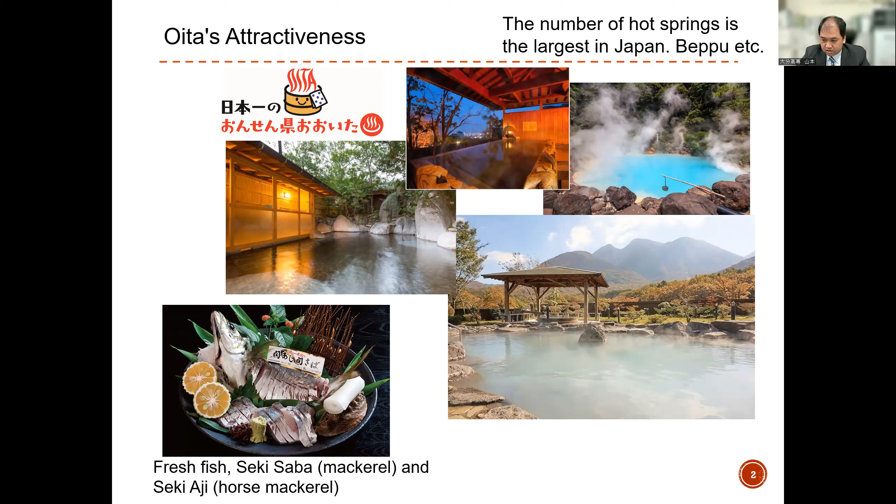Next, I will move to today's topic. Firstly, I want to speak about why maintenance of concrete structures is necessary, according to Japan's current situation regarding infrastructure. First, I want to check some technical terms. Corrective maintenance: major repairs are made after the structure's performance has deteriorated and damage has become severe. Second, preventive maintenance: repairs are made in the early stage of deterioration, before the structure begins to lose performance.

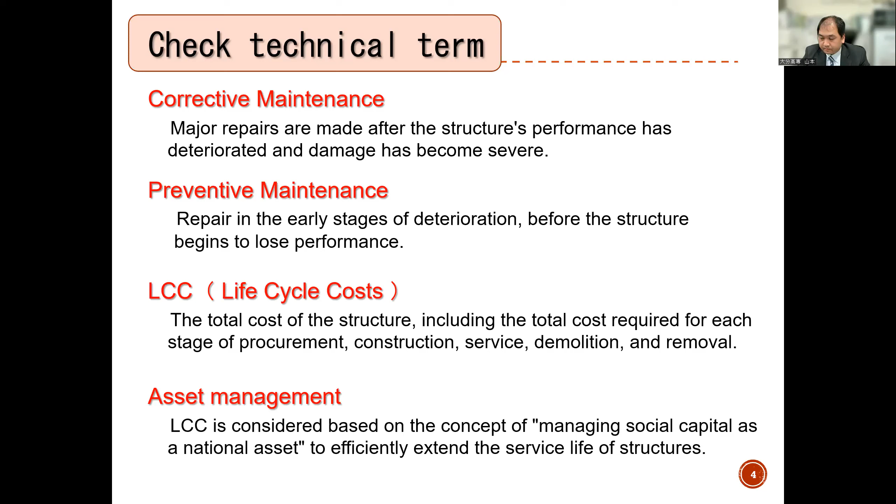Next is LCC, or life cycle cost—the total cost of the structure, including the costs required for each stage, such as construction, service, demolition, and removal. Next is asset management, where LCC is considered based on the concept of managing social capital as a national asset, in order to efficiently extend the service life of structures. This slide shows information from a report by the Ministry of Land, Infrastructure, Transport and Tourism, which is a government organization in Japan.

Countermeasure for aging social facilities. In Japan, the infrastructure developed during the high growth period, and that infrastructure is expected to deteriorate in the near future at the same time.

Here you can see the table. This table shows the percentage of social infrastructure that is more than 50 years old after construction. In Japan, around 30 or 40 years before, most of the infrastructures were constructed at almost the same time.

So the number of 50-year-old infrastructure will increase rapidly. Here you can see the 50-year-old after construction of the bridge: in 2018, 25%; in 2023, 39%; and in 2033 it becomes 63%.

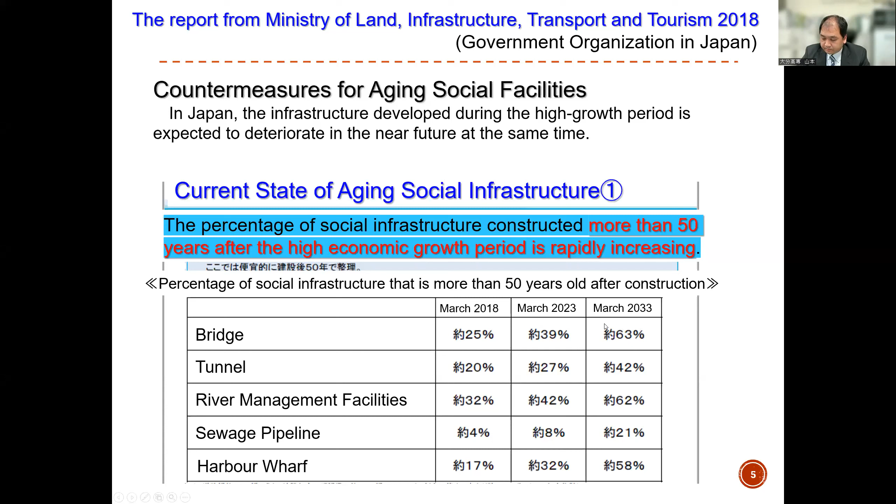Next shows the same condition of a bridge. This diagram shows the current state of aging social infrastructure, for example, road bridges over 2 meters.

In 2018, 25% of bridges are more than 50 years old. But in 2033, 63% of bridges become more than 50 years old. So in the Japan situation, most of the bridges should be repaired or maintained.

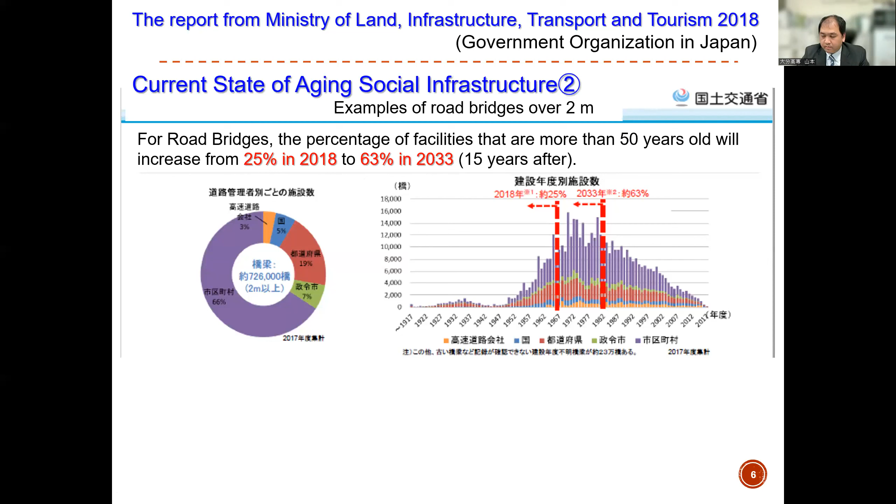And then the important countermeasure is how to optimize LCC and asset management. LCC indicates the initial construction cost, maintenance and management cost, and final disposal cost. The total cost is LCC.

And then, to promote a shift according to this thinking method of LCC, Japanese maintenance is shifting to preventive maintenance. It means that if the corrective maintenance method is chosen, the total cost becomes high. But with preventive maintenance, the total cost becomes lower.

So the Japanese government has to repair a huge number of infrastructures. As a countermeasure, the government started the preventive maintenance method. Perhaps in Indonesia, currently a huge number of infrastructures are ongoing construction. So in your country, how is it? You should also pay attention to LCC, how to optimize the LCC.

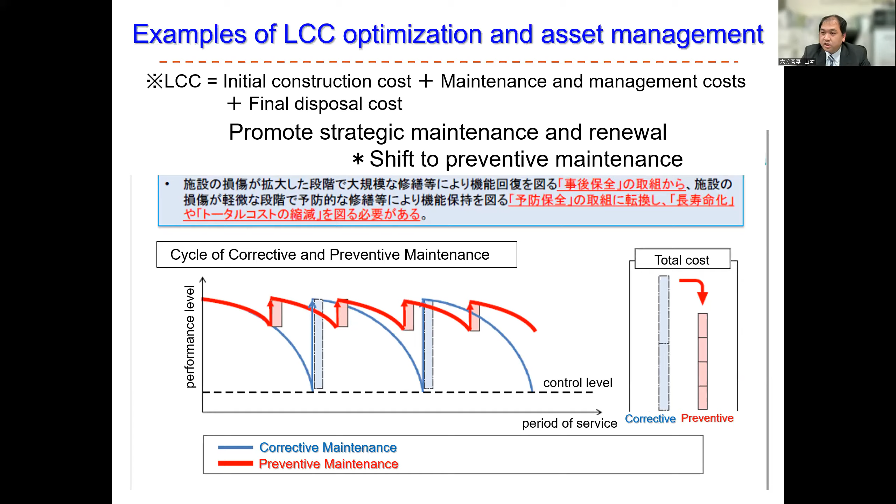Next, I will introduce the deterioration of concrete. Cracks in concrete can be categorized like that. Firstly, cracks caused by external forces. And as an initial failure, cracks due to drying shrinkage, cracks due to autogenous shrinkage, cracks due to thermal effects, and cracks due to age-related deterioration.

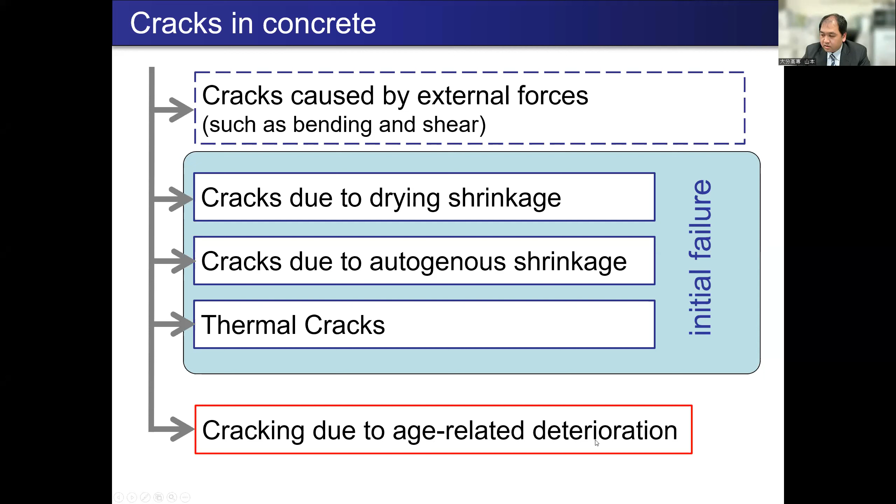Factors that cause structural deterioration: type of deformation number 1, initial failure; number 2, degradation over time; and number 3, structural deformation.

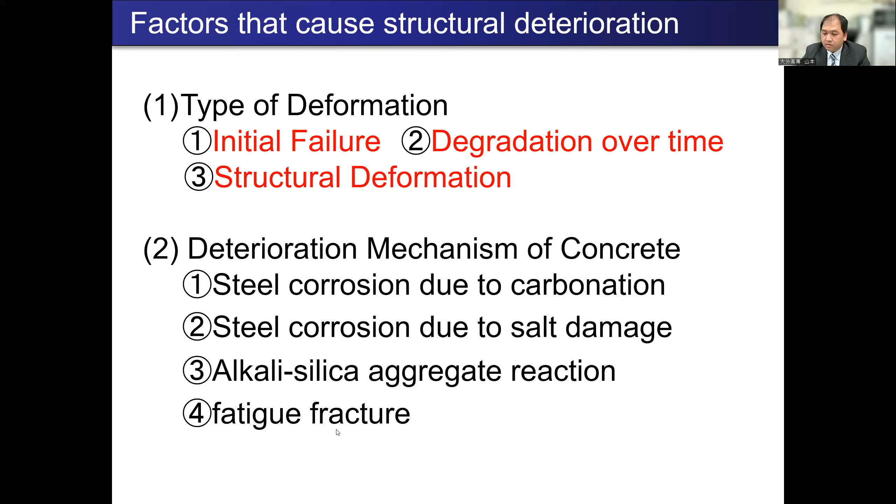The deterioration mechanism of concrete can be categorized into 4 types: first, steel corrosion due to carbonation; steel corrosion due to salt damage; alkali-silica aggregate reaction; and fatigue failure, fatigue fracture.

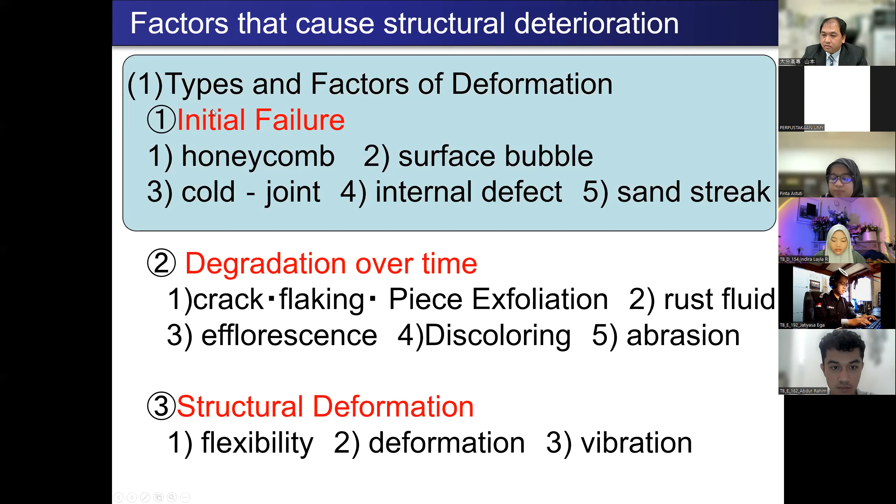As a structural deformation: flexibility, deformation, and vibration. As an initial failure, it can be explained like this: firstly, bleeding-affected failure, sinking crack, plastic shrinkage cracks, and water channels. Construction conditions affect failure: honeycomb, surface bubble, and cold joint.

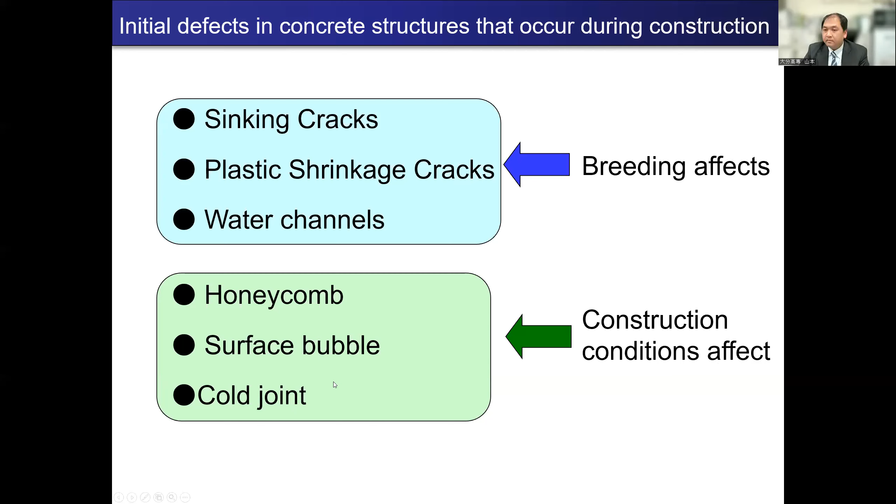This figure shows the bleeding that occurs in concrete. Bleeding is a kind of segregation, where concrete with a lot of bleeding shows segregation of the water. If the water-to-cement ratio is large, bleeding easily occurs. If the unit weight of water is large, bleeding will easily occur. If the granular content in aggregate is small, bleeding will easily occur. And if the slump is large, bleeding easily occurs. So under those conditions, bleeding easily occurs, and to restrain it we have to pay attention to those factors.

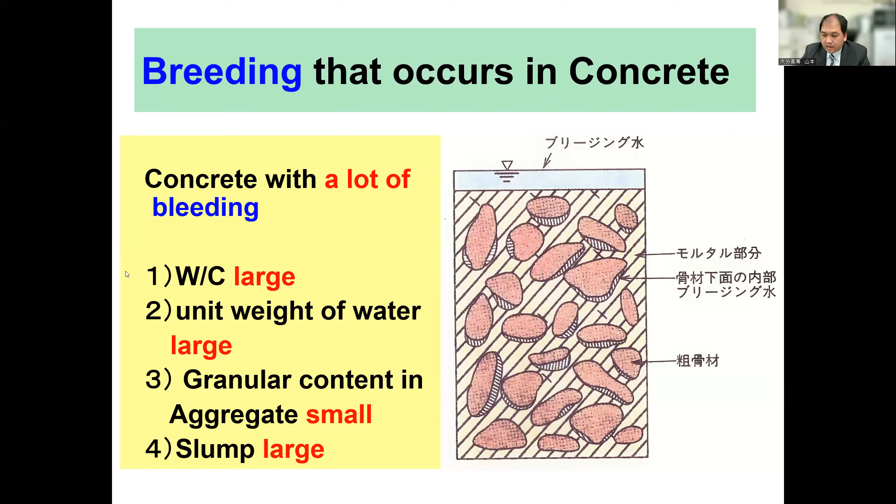Second, this figure shows sinking crack. Sinking crack means that if bleeding occurs on the concrete, the water will rise up. Instead, the surface of the concrete will sink, and the water will come up to the surface. Then a water channel will remain even after the concrete hardens, and the water also gathers at the bottom of the steel. Then after hardening, this area becomes a kind of void. This is sinking crack.

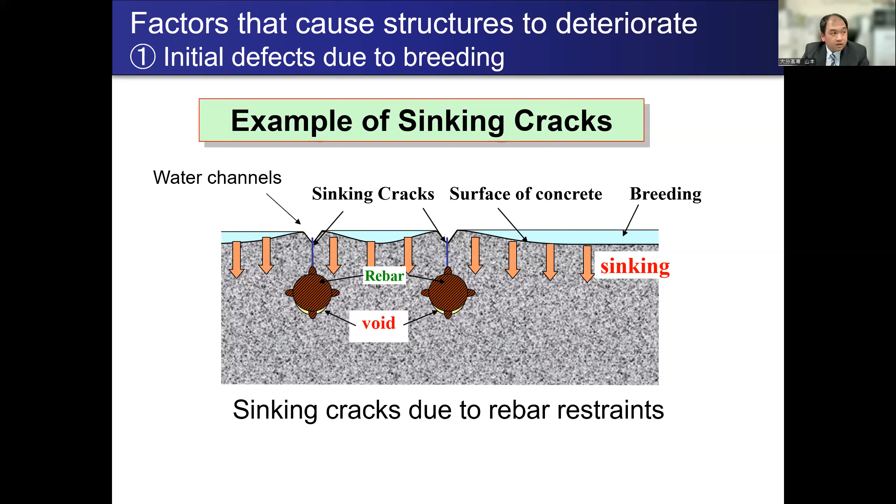Next, if sinking crack or a large amount of bleeding occurs, the water channel will remain even after the concrete hardens. From this picture, can you see the water channel remains? And if carbonation occurs, then along this water channel, CO2 easily penetrates into the internal part of the concrete.

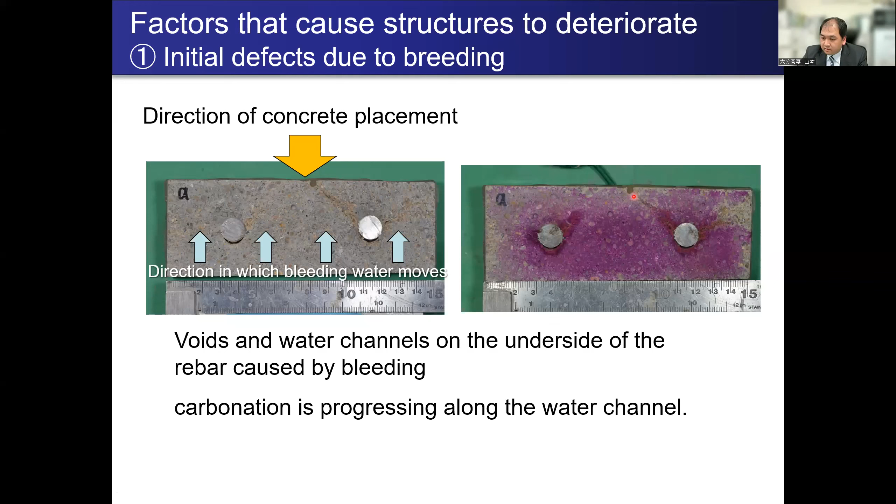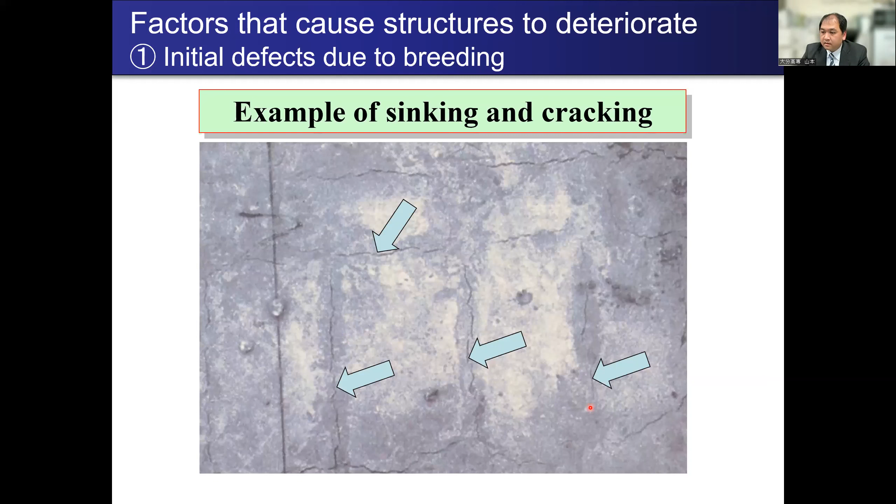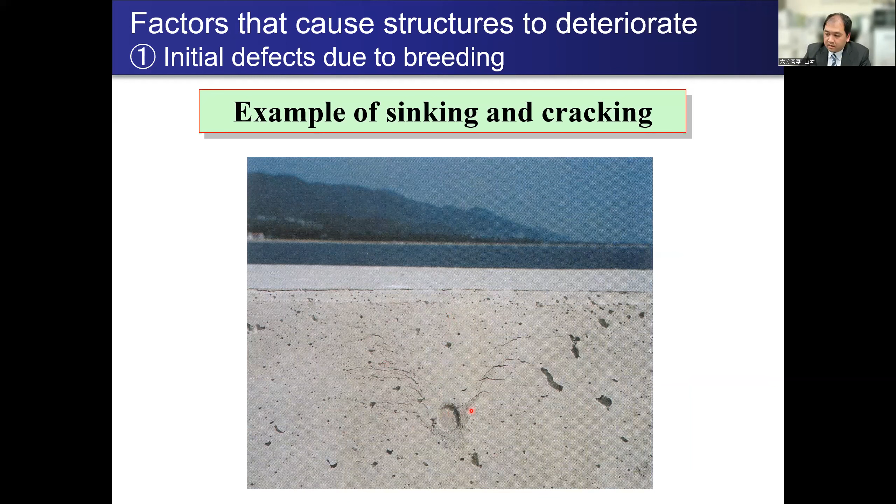This is a water channel, and along this water channel, carbonation proceeded. This is the sinking crack from the surface of the concrete. You can see the cracks along the rebar. This is also due to a much amount of bleeding. This is a kind of water channel, and this also the sinking crack. Before the concrete hardened, fresh concrete becomes sunk, and then the crack remains even after the concrete hardens.

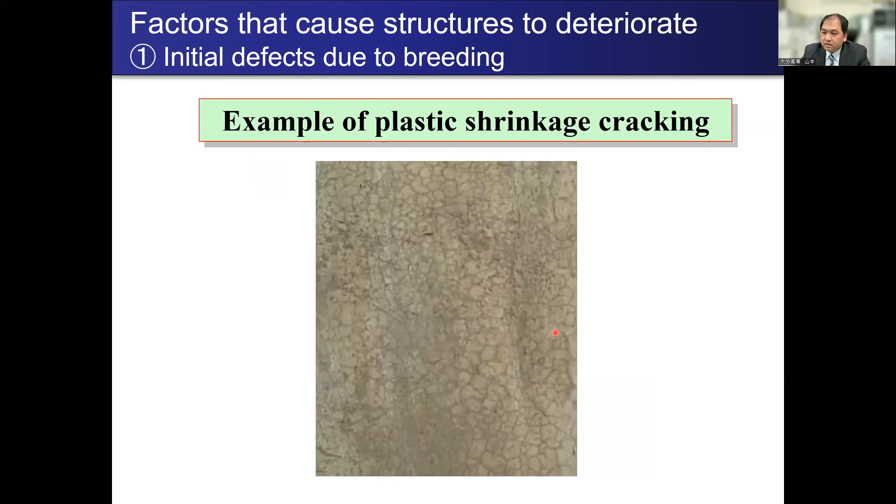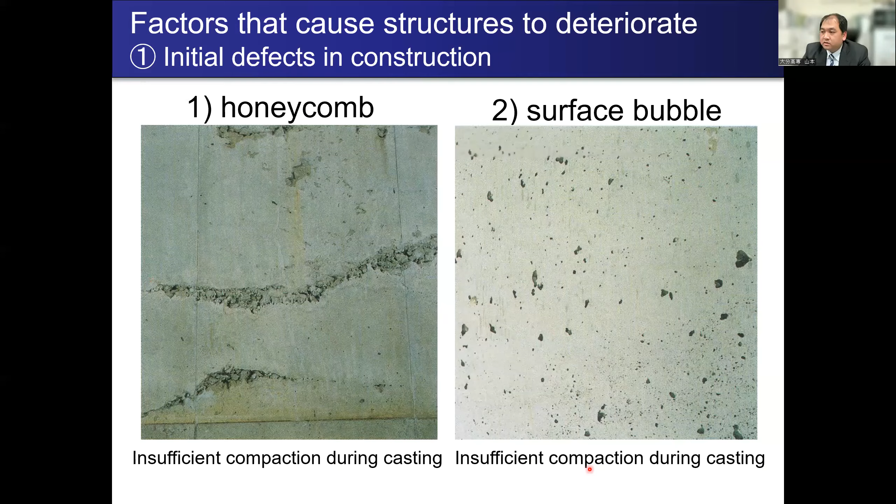Next is cold joint. What is the cold joint? The time interval between the lower and upper levels during casting was too long. If the interval time is too long, this kind of cold joint will occur. At the time of casting, if the interval is too long, the lower part of concrete starts hardening. Then even when the upper part of concrete is casted, it already starts hardening at that time. So here, this kind of crack will remain. This is cold joint. Next, internal defect.

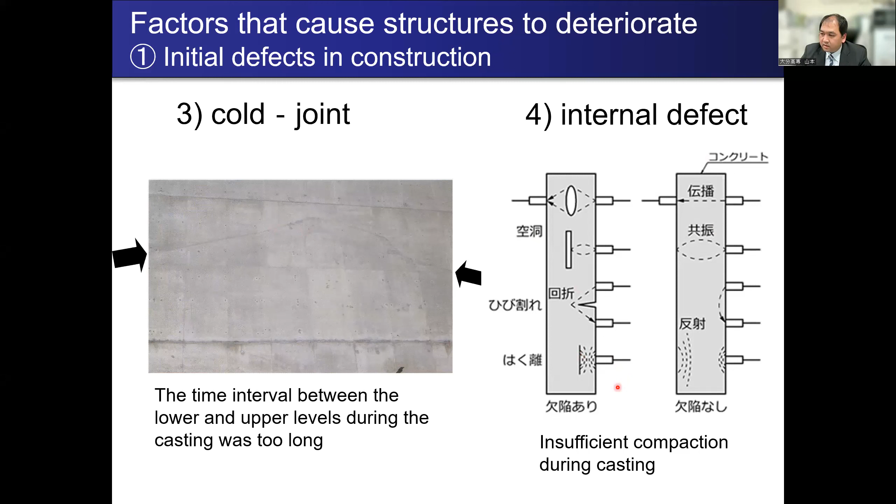Internal defect is a kind of honeycomb, or some kind of void that remains inside the concrete. That is internal defect. And sand streak: lack of viscosity of the fresh concrete fit between the formwork and the concrete. Bleeding water was rising from the gap between the formwork and the concrete, then the surface of concrete becomes like this. Between the formwork and the concrete, the bleeding water will rise up, so the surface of concrete becomes like this. This is sand streak.

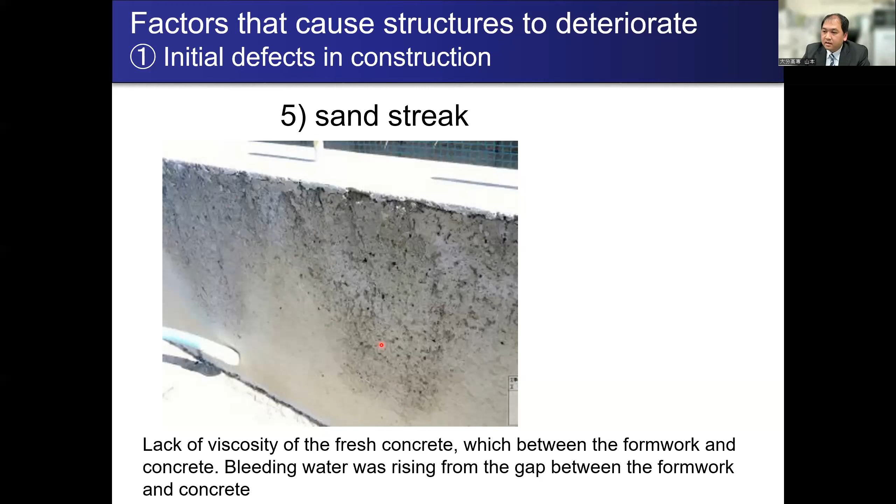Next is degradation over time. This is due to corrosion. Firstly, number one is crack, flaking and piece exfoliation. Due to degradation over time, pieces of concrete will fall down. That is crack, flaking and piece exfoliation.

Second is rust fluid. Because the steel bar already corroded, the rust fluid comes up to the surface of concrete, then the concrete surface will be like this figure.

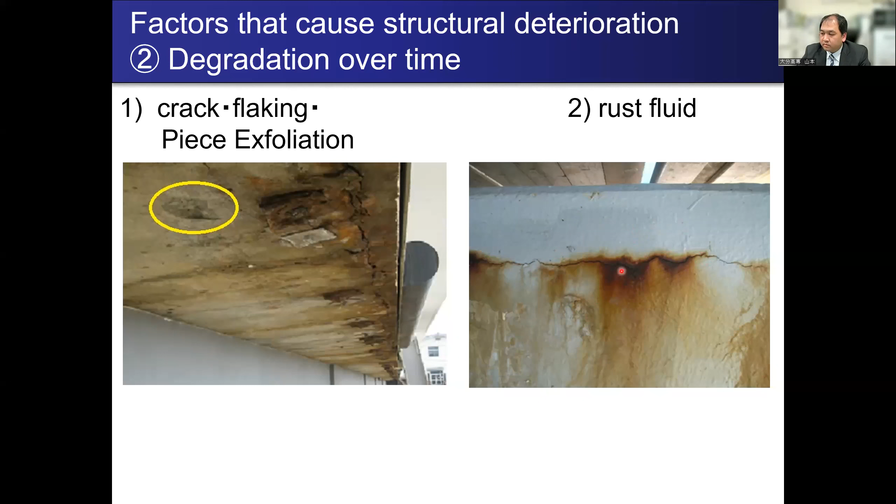Next is efflorescence. Due to an existing crack, the internal calcium dissolves into water, and with the water, the calcium comes to the surface of concrete. Then the surface of concrete will be like this picture. That is efflorescence. And discoloring: how to say, it becomes dirty. Discoloring means it becomes dirty.

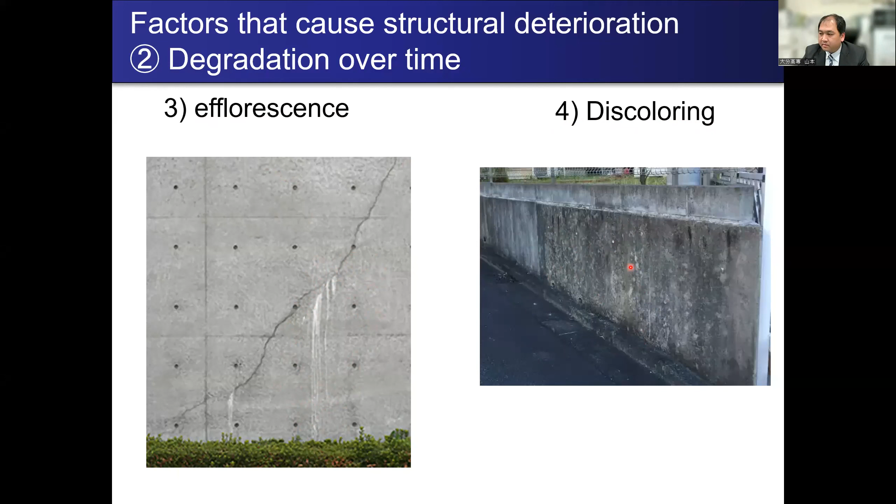And abrasion: this is a water channel, and the surface part of cement paste is washed out. Then the aggregate appears. This is abrasion. Those are the degradation over time.

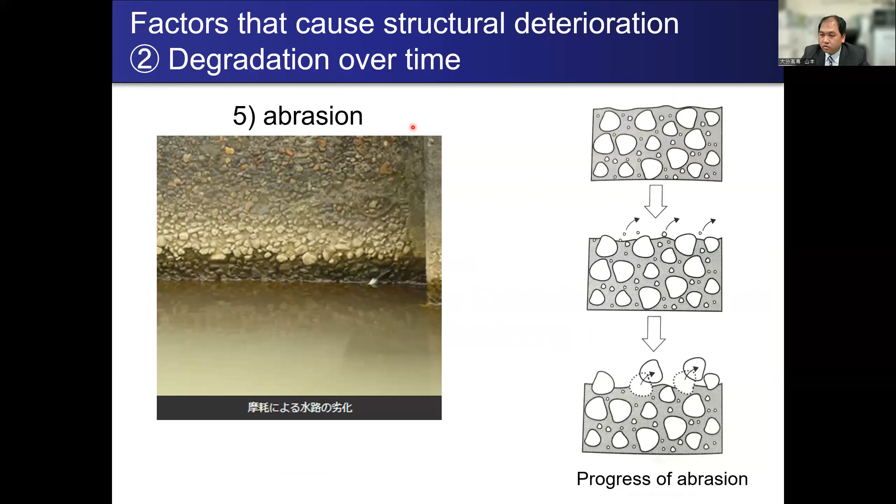Number 3, I will skip. Next, I want to explain the deterioration mechanism one by one.

First is carbonation. Carbonation is a phenomenon in which atmospheric CO2 enters into concrete and causes a carbonation reaction with cement hydrate, such as CaOH2, thereby reducing the pH of the pore solution. The CO2 in the atmosphere comes into the concrete, and then the CaOH2 becomes CaCO3, and the alkalinity of the concrete reduces, and then the passivity film disappears, and progress of corrosion starts.

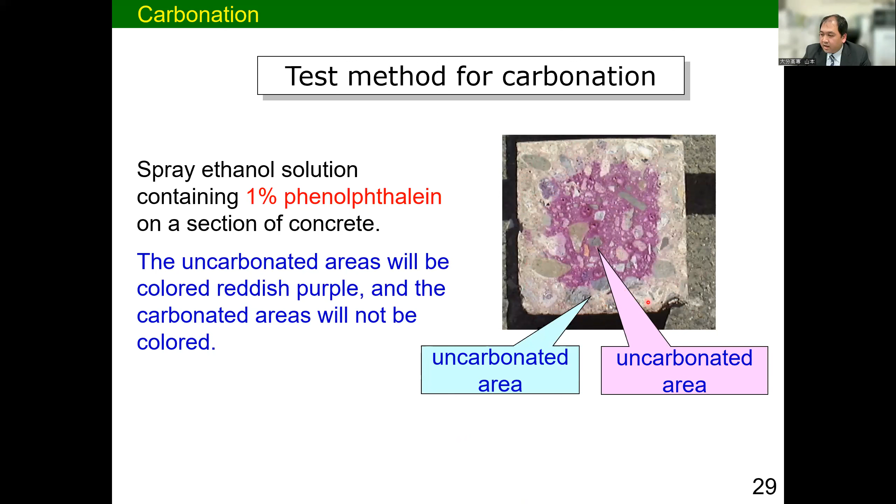Then, due to the corrosion of the rebar, cracking, concrete spalling and decrease in load bearing capacity will occur. How to check carbonation: spray 1% phenolphthalein. If enough alkalinity remains in the concrete, the color will be red purple. But if the alkalinity has already decreased, there's no color change. This no-color-change area is already the carbonated area.

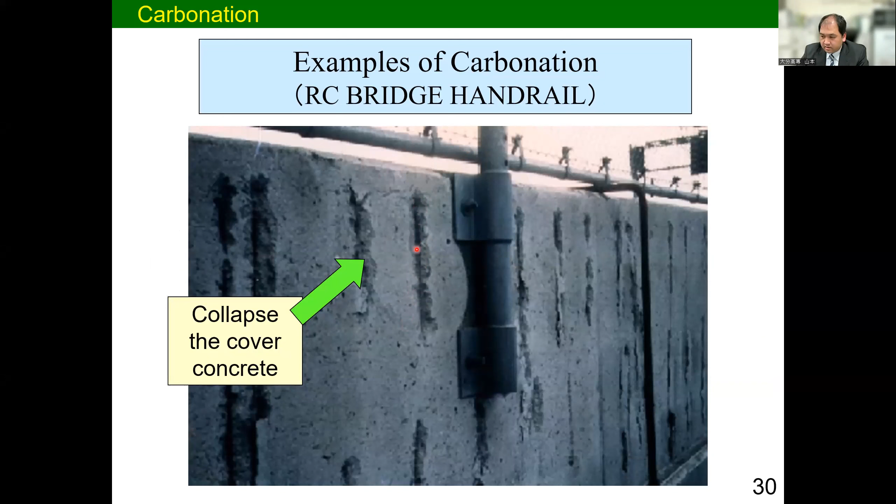Those are the deterioration conditions of RC members due to carbonation. Because of carbonation, the steel bar corroded, then the covering concrete part spalls. This is also due to carbonation. This is also due to carbonation. This is also due to carbonation.

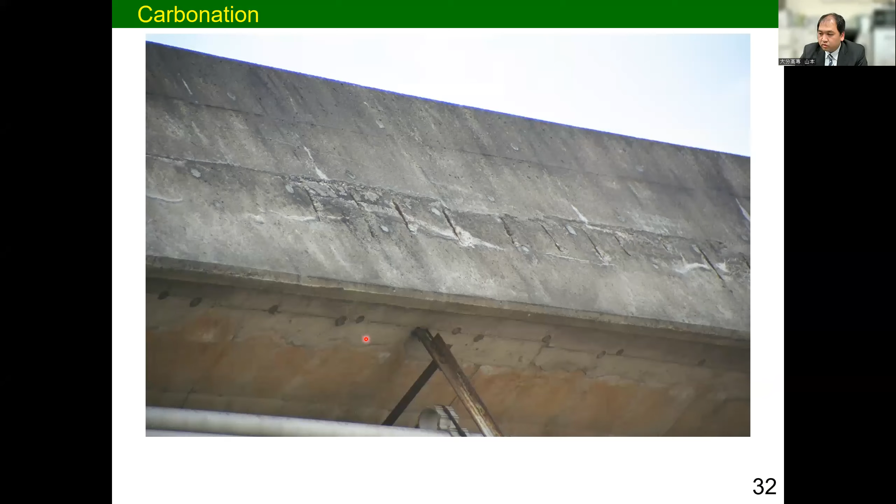Carbonation: if the carbonation area reaches the surface of the rebar, then the passivity film of the rebar will be destroyed and start rusting.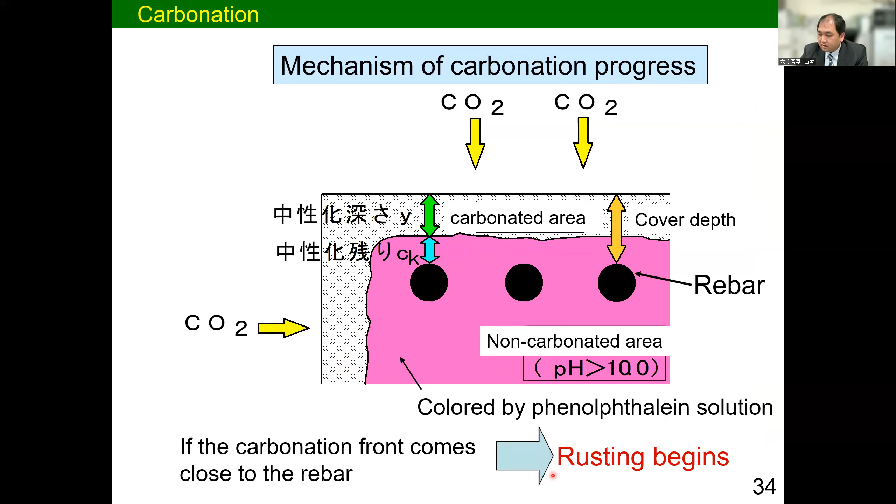Next is salt damage. Salt damage is a phenomenon in which the presence of chloride ions causes the corrosion of steel in concrete, resulting in rusting, cracking, spalling, and cross-sectional reduction of the steel due to the expansion of volume of corrosion products. If chloride ions penetrate the concrete and reach the surface of the steel, they destroy the passivity film, and then the corrosion process starts, leading to cracking, concrete spalling, and decrease in load bearing capacity.

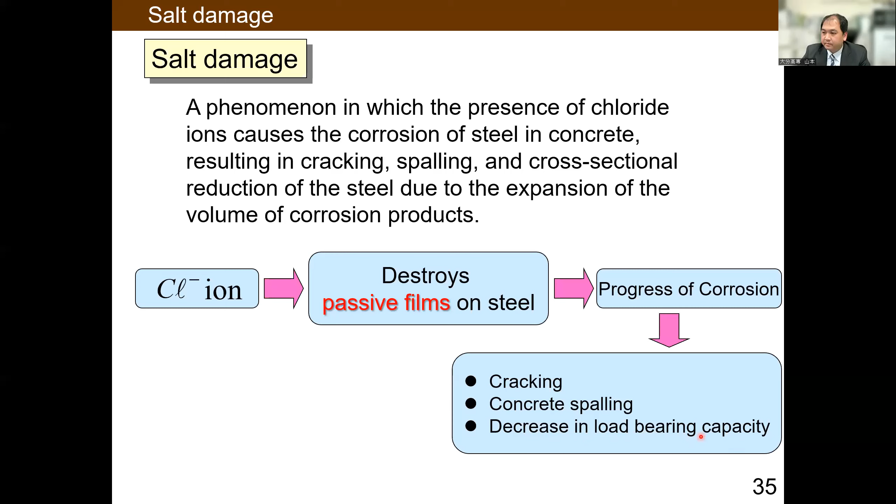So this is a chemical reaction of corrosion of the rebar. Because of this mechanism, the metal Fe of the rebar will be corroded.

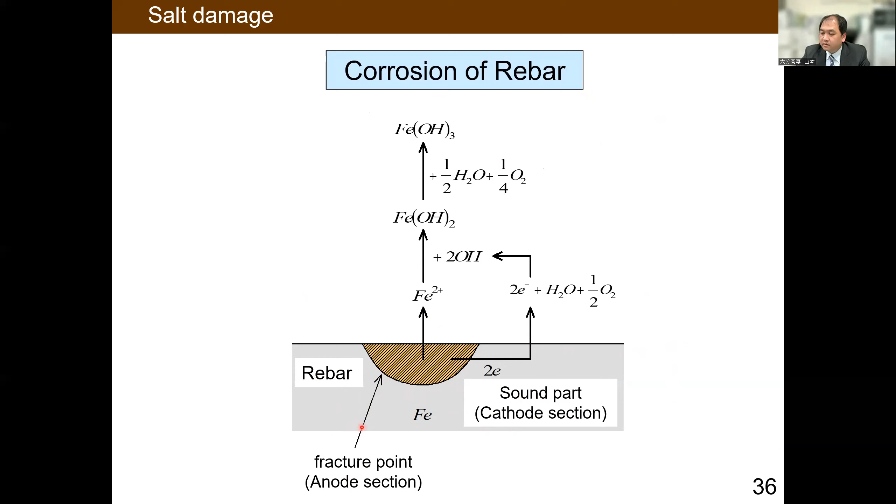Those pictures show the scenery of corroded RC members. Due to chloride ion, the steel bar corroded and the covering concrete already spalling.

Next, actual cracks due to chloride corrosion. Along this line, the steel bar is embedded, but the steel bar already corroded. On the corroded area, the steel bar expands, then cracks appear. You can see rust stain.

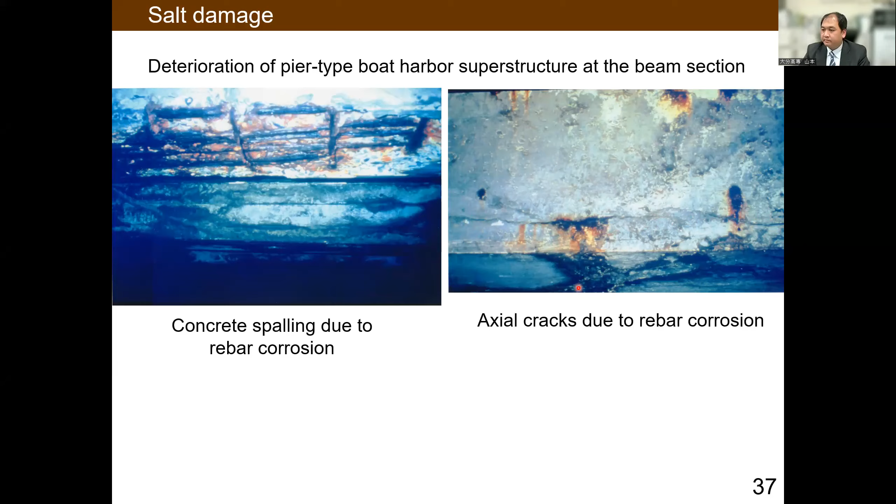Next is progress of salt damage on PC bridge girder. It progresses to section loss and failure of stirrups and PC steel wire. It might be necessary to consider whether it is necessary not only to repair but also to reconstruct the lost bearing capacity.

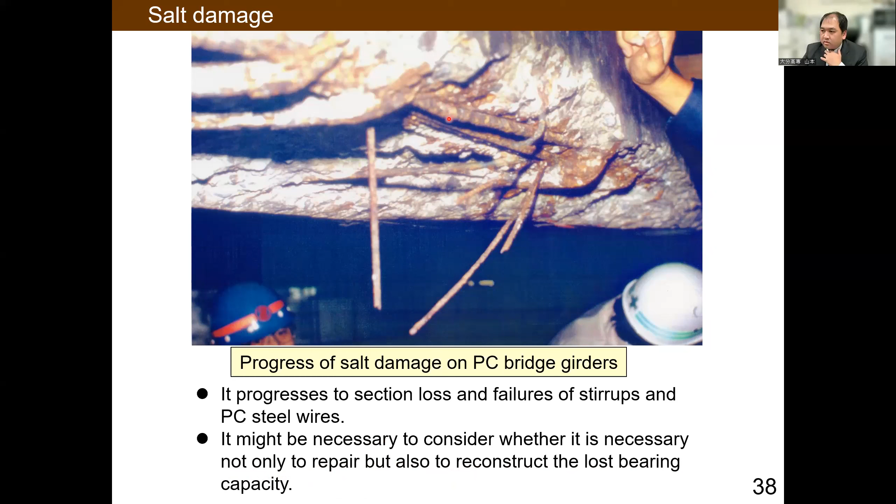And next is alkali silica reaction, in other words ASR. What is ASR? Aggregate reacts with alkali inside concrete, then expands the aggregate and crack occurs. That is ASR.

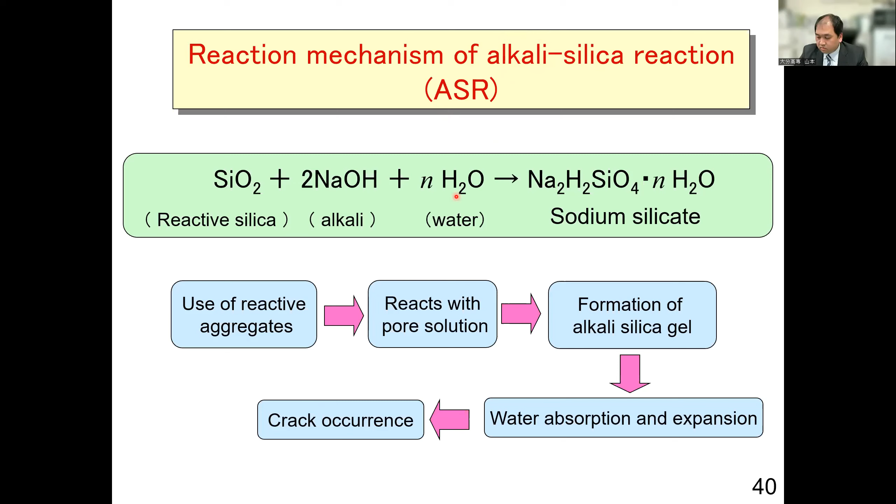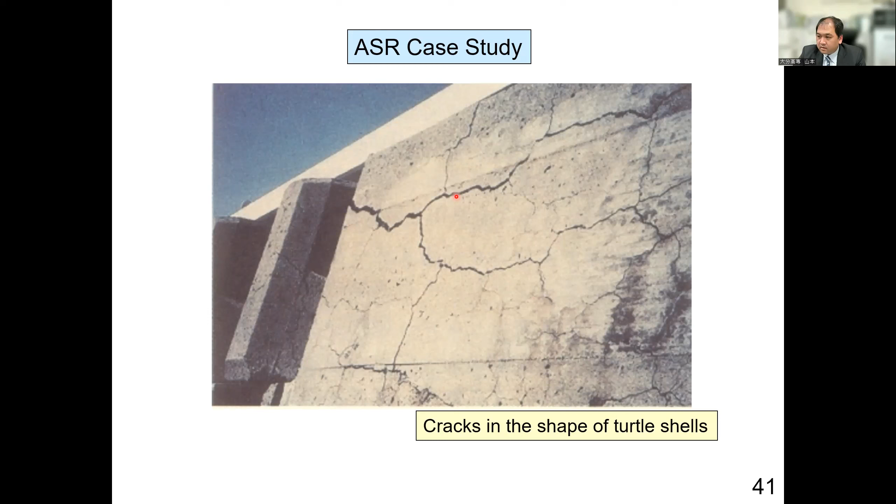This is a case study of ASR. Cracks in the shape of turtle shells. This is also ASR.

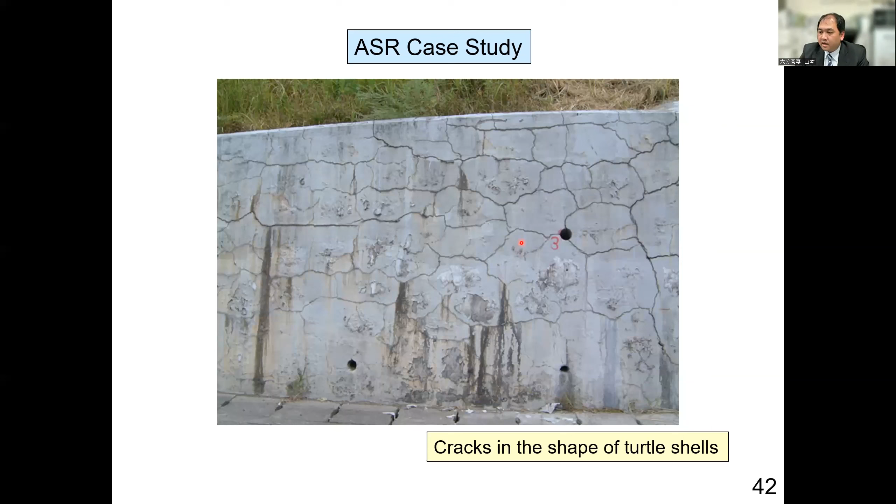Even if reactive aggregate were used and alkalinity is high, if there's no moisture, ASR will not occur. And even with high alkalinity and enough moisture, if reactive aggregate is not used, ASR will not occur. So those three conditions should be satisfied at the same time for ASR to occur.

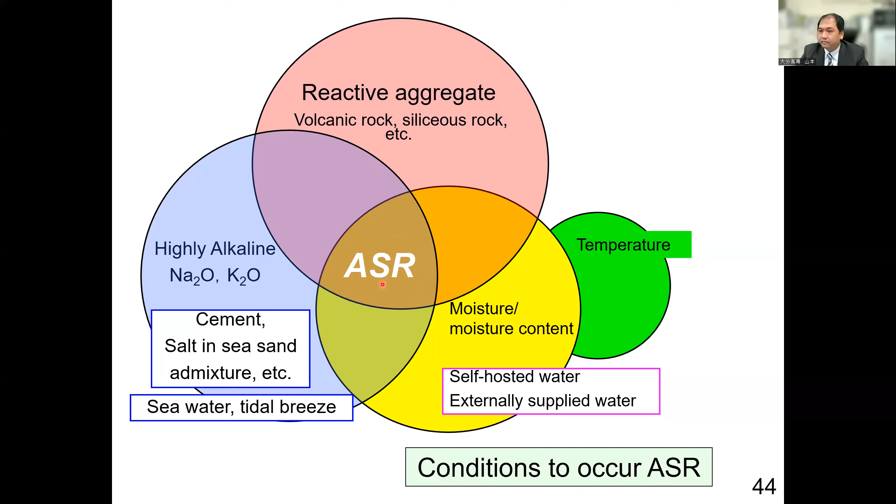Next is fatigue fracture, a phenomena in which a material is subjected to repeated loading at a level lower than its static strength, resulting in failure. Cracks develop and propagate in the concrete due to repeated loading, and eventually the load-bearing capacity is reduced due to steel fracture.

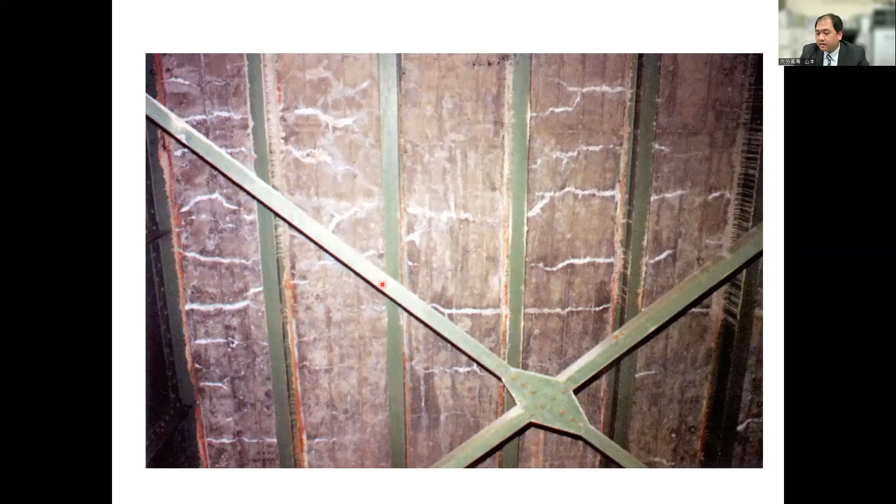Then the slab will be destroyed like that. Even small loading, less than static strength, but repeated...

A huge number of repetitions over a long term, then even small load acting for a long time, fatigue failure will occur.

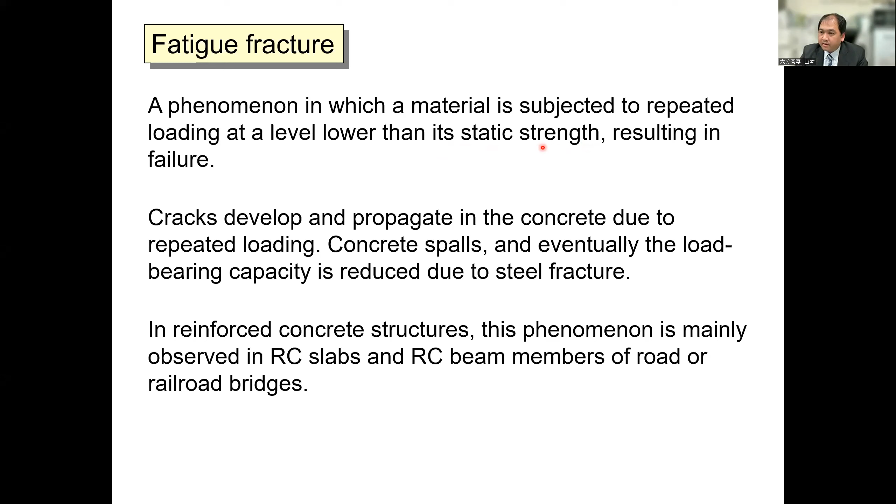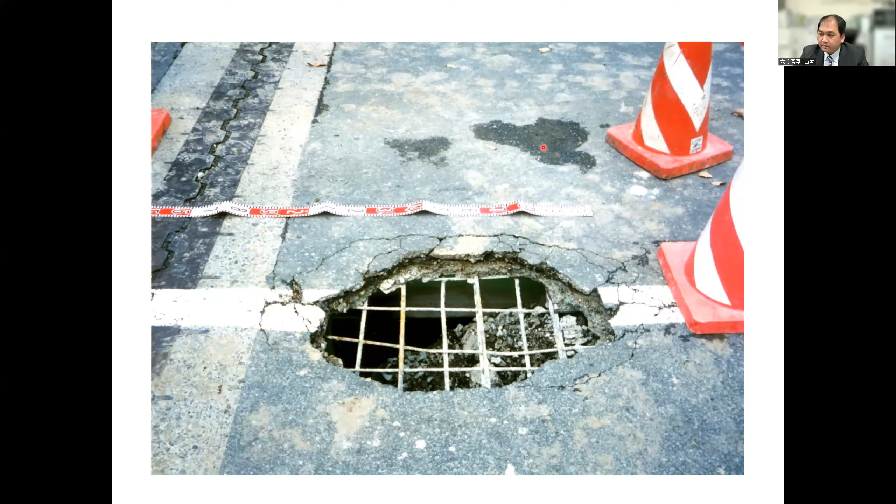In Japan's condition, most highway road bridges become around 50 years old. So this kind of failure is detected, and so many slabs were renewed nowadays due to fatigue failure.

So up to now, I explained about the deterioration or degradation of concrete. Then I will change the topic: how to make good concrete and prevent such kind of defect. I will explain how to make good concrete. What is good concrete?

If concrete has required strength, small hydration heat, is economical, has less initial defect, high durability, good workability and less segregation, then we can call that good concrete.

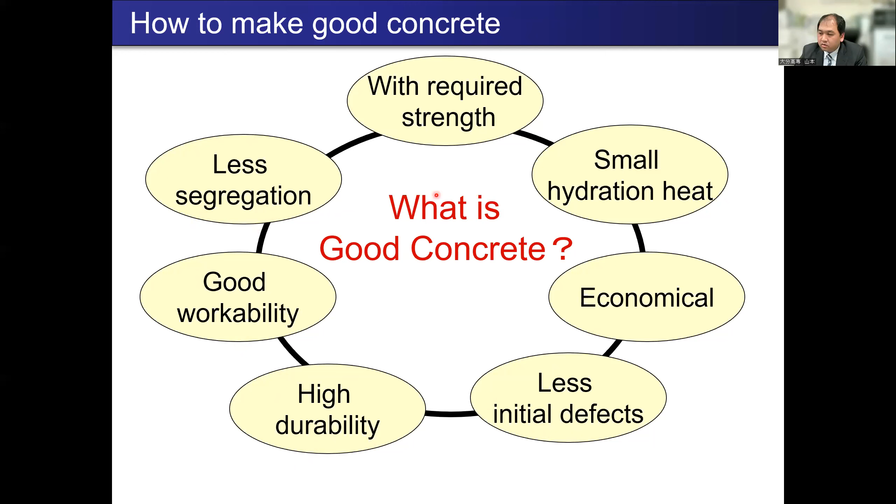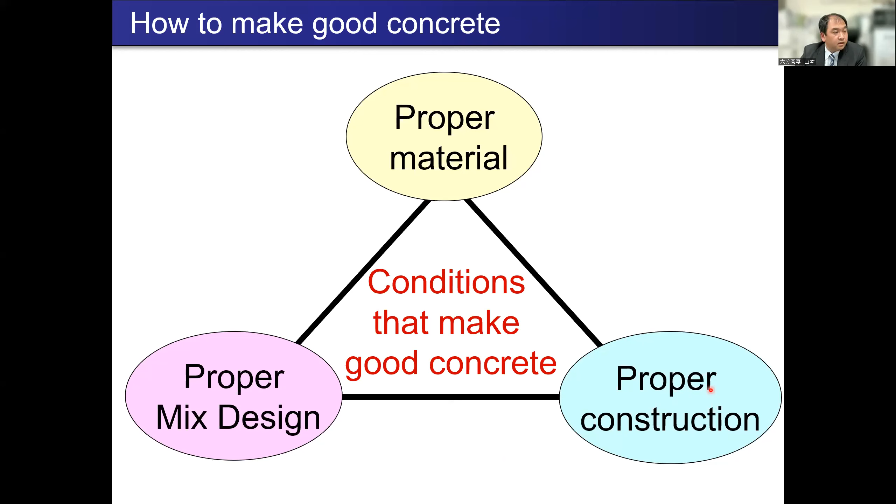And next, this diagram shows how to make good concrete. To make good concrete, we satisfy those three: use proper material, do proper mix design, and do proper construction. Then we can make good concrete.

And we have to pay attention to durability. We have to think about durability, the mechanism of degradation. What is the durability of concrete structures? Ability to resist weathering, chemical attack, physical abrasion, and other degradative actions, and to maintain the required mechanical and functional performance of the structure for a long period of time.

To make good concrete, good resistance to salt damage and chemical attack, frost damage, abrasion, ASR and carbonation is required.

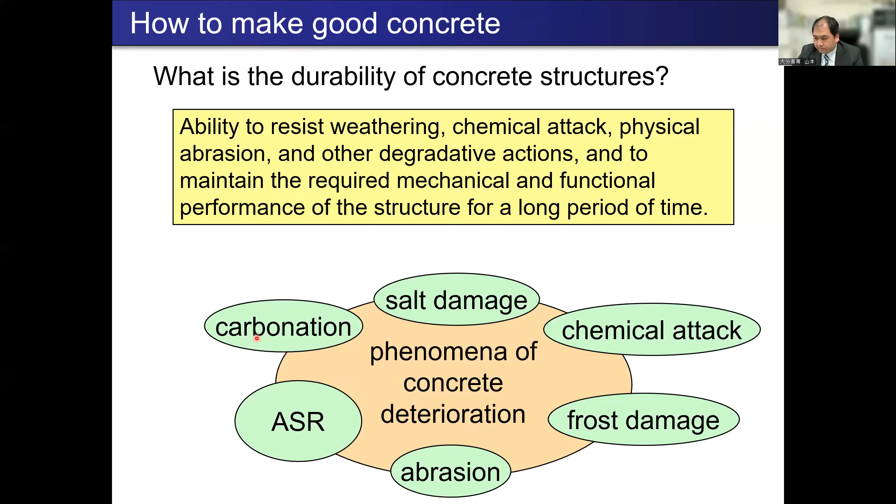Then, how can we make durable or good concrete? To make durable concrete: reduce water to cement ratio, densification of the microstructure of concrete, consider the possibility of thermal cracking in case of high cement content, select proper materials, and if proper materials were chosen, restrain water absorption.

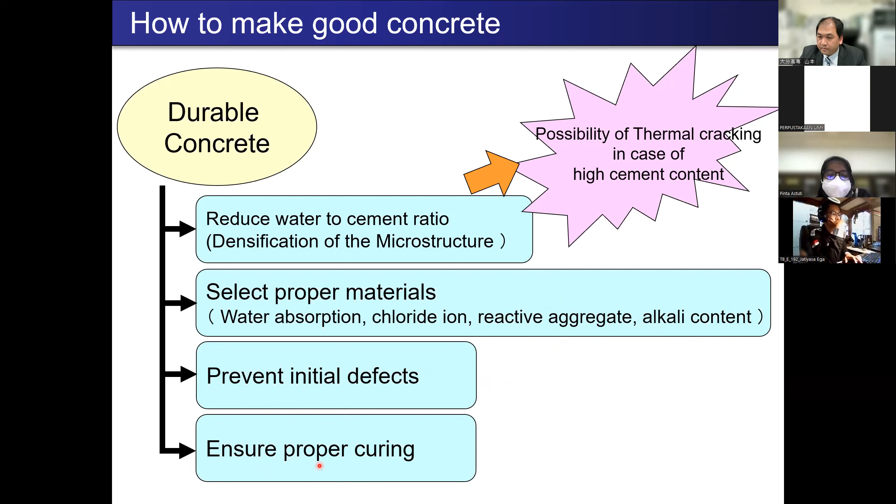Select proper materials. How to select proper materials? Small water absorption, and check the chloride ion and control chloride ion. When mixing concrete, do not use reactive aggregate, and control chemical alkalinity of concrete when mixing. And in construction, we have to prevent initial defect. After casting concrete, we have to do proper curing.

Next, this diagram shows the relationship between water to cement ratio and strength at 28 days.

If the water to cement ratio becomes higher, then the strength of concrete will reduce. Even if we use the same materials, if the water to cement ratio is smaller, the strength of concrete will be increased. When we design the concrete mixture, we have to pay attention to the water to cement ratio. If we choose a small water to cement ratio, then the strength of concrete will be increased. It means densification of the microstructure of concrete.

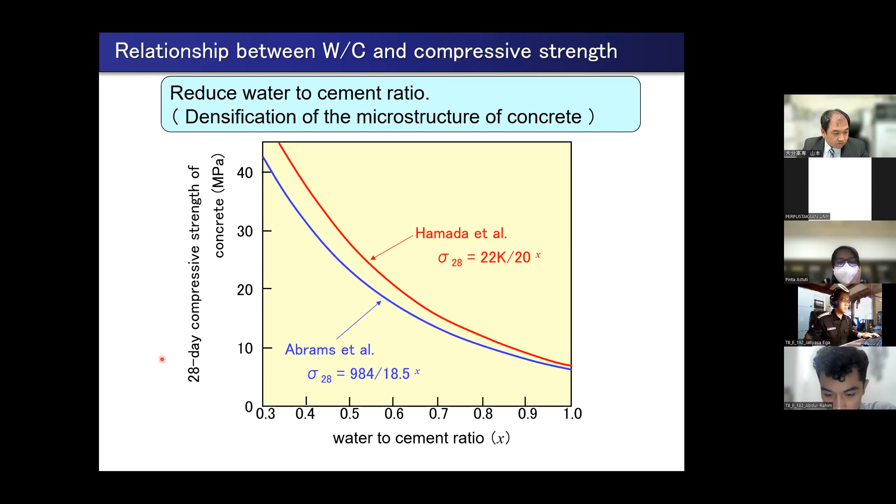This diagram shows the relationship between C by V, where V means void, or cement porosity ratio. If the void of cement is smaller, then the strength of concrete will increase. To make the void smaller, we have to choose a smaller water to cement ratio.

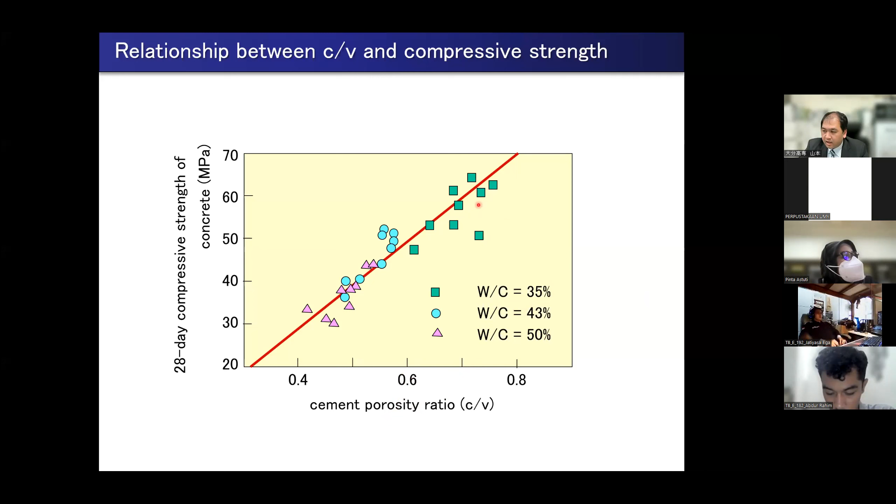This diagram shows the relationship between several curing conditions and strength of concrete. If the concrete were cured in air, the strength increment will follow this red line. If immersed in water until 3 days, then kept in air, the strength increment will follow this line. And if continuous wet curing were conducted, the strength increment will follow this blue line.

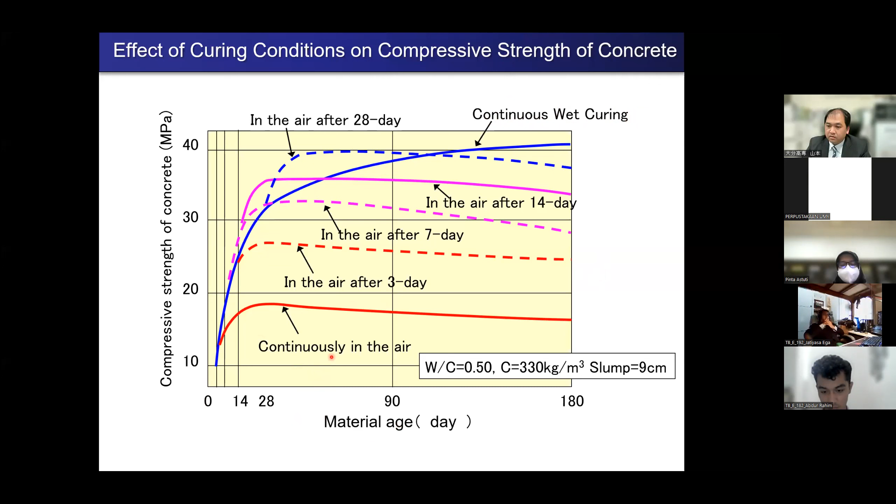So even if the same materials and same mixed proportions were used, if the curing condition is different, the strength of concrete will be different also. This shows the curing condition and strength of concrete.

Next shows the relationship between strength and durability. I explained that if the water to cement ratio is smaller, strength will be higher. But not only water to cement ratio, other conditions will also influence the strength of concrete. So even at the same water to cement ratio, different strengths occur under different conditions.

Usually for high strength concrete, if the strength is high, the durability is usually high. But durability may be varied even at the same strength. So this is not equal, nearly equal, but not equal.

Regarding the relationship between durability and water to cement ratio: if the water to cement ratio is lower, then the durability will become better. A small water to cement ratio means a highly durable concrete.

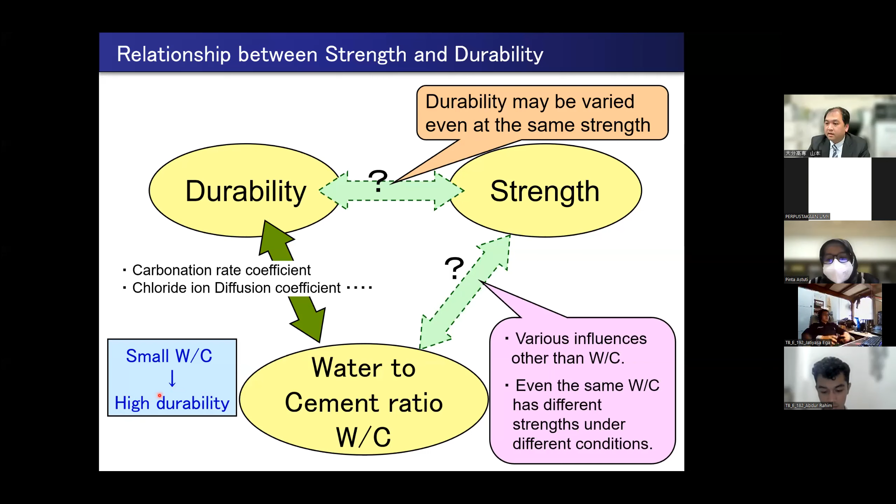Next, this diagram shows the relationship between total void volume and compressive strength. If the total void volume is smaller, it means durable concrete, and the strength becomes high. So this relationship indicates that as the void volume inside cement paste decreases, strength becomes high.

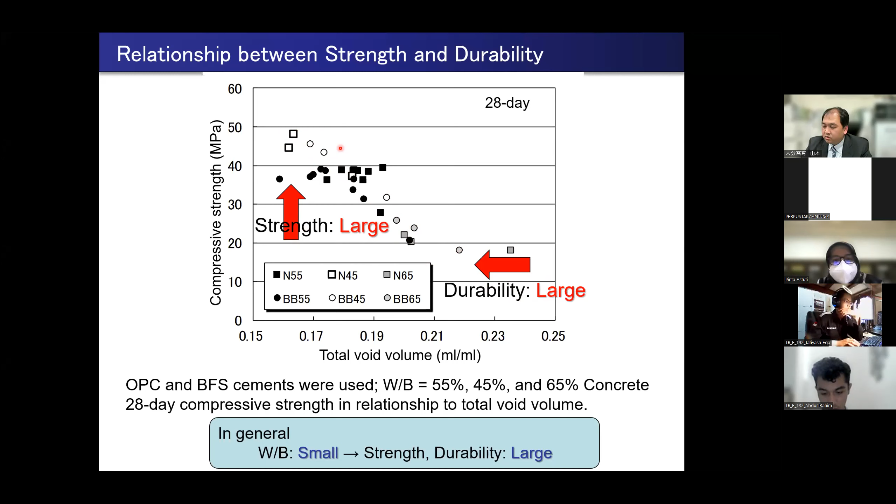High strength concrete has high durability. This is one case. But if the curing condition becomes different, the durability becomes a different condition.

Even if the same concrete were used, if the curing condition is different, then the durability of hardened concrete also becomes different. Until 28 days, curing in water indicates the best performance.

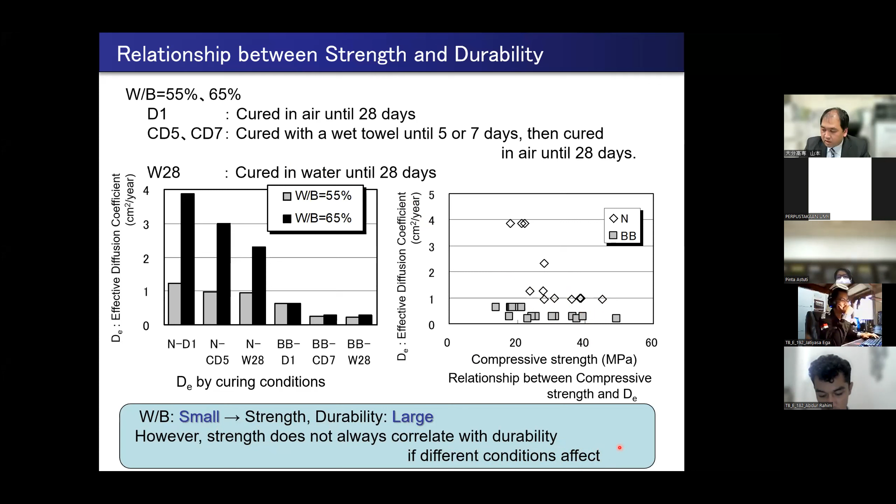This plot means if cured in air, the concrete has lower strength, but if cured inside water, the strength of concrete will increase. If the water to cement ratio is small, strength and durability will be large. However, strength does not always correlate with durability if different curing methods are used, which will affect the quality of concrete after hardening.

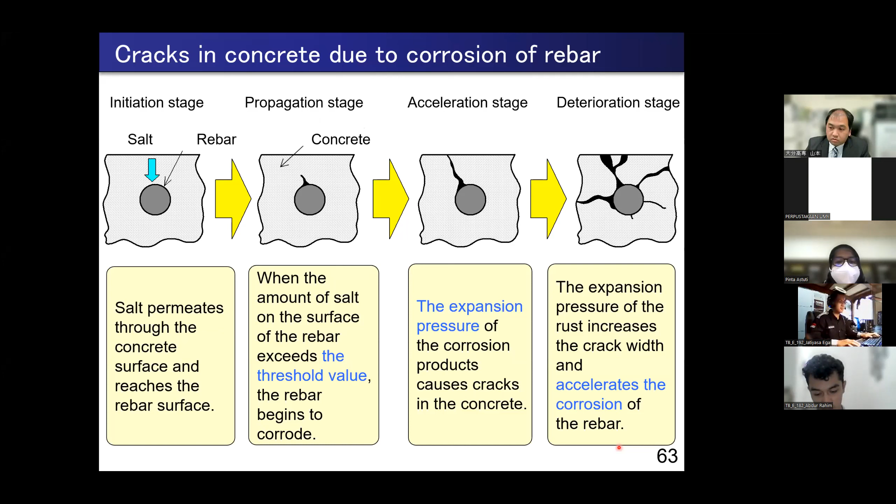Then, next. Up to now, I explained the degradation or deterioration of concrete and how to make good concrete and avoid such kind of degradation. Now I want to change the topic.

When considered from the aspect of environmental conservation, what is required for future concrete work?

In cement production of concrete materials, I mean the production of cement. For example, ordinary Portland cement is made mainly from limestone. The limestone is burned using a kiln at about 1,000 to 1,450 degrees Celsius.

During this process, CO2 is emitted to produce 1 ton of ordinary Portland cement. 766 kilograms of CO2 will be released. This is because thermal decomposition of the main raw material, limestone, CaCO3, becomes CaO and CO2 when burned using a kiln. This process uses a large amount of energy, so fossil fuels are consumed. The total amount of CO2 emission will be 766 kilograms per ton.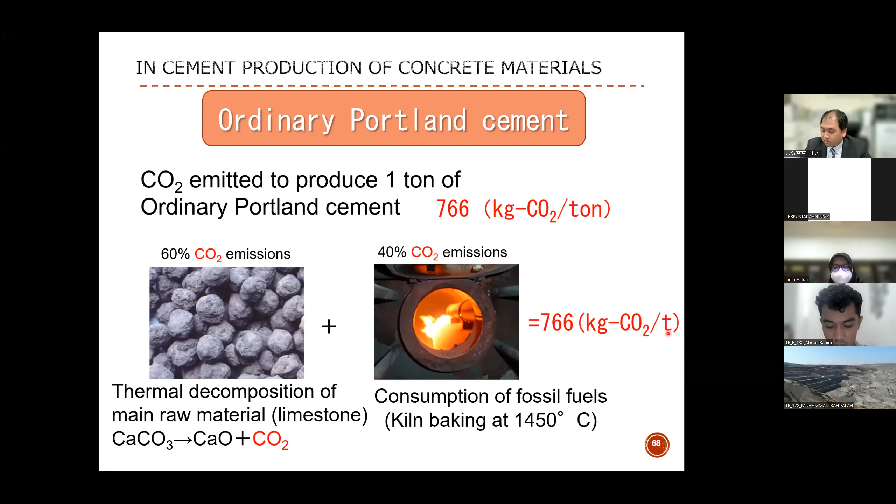So, if we use the cement, it means that during the process of producing cement, the CO2 will be emitted.

So what can we as civil engineers do to reduce CO2 emissions from construction? Here you can see active use of blended cement, for example blast furnace slag cement and fly ash cement. This can reduce clinker use, and reduction of clinker reduces CO2.

And when building a new concrete structure, LCCO2, life cycle CO2, should be reduced by constructing a high quality structure and extending its service life. In general, when LCCO2 is reduced, LCC will also be reduced, but the initial cost for construction will be higher.

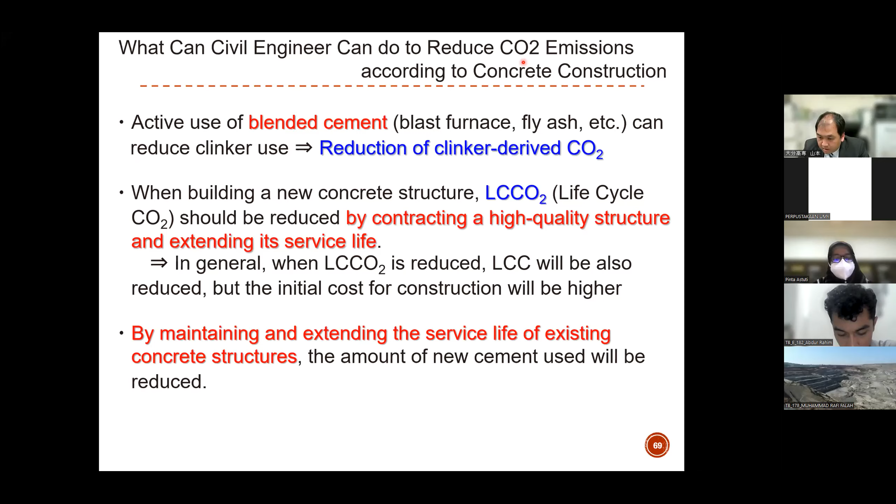If we can do these 3 items, then we can contribute to industry, innovation, and infrastructure, and sustainable cities and communities, and responsible consumption and production, and climate action. I think that is a very important point.

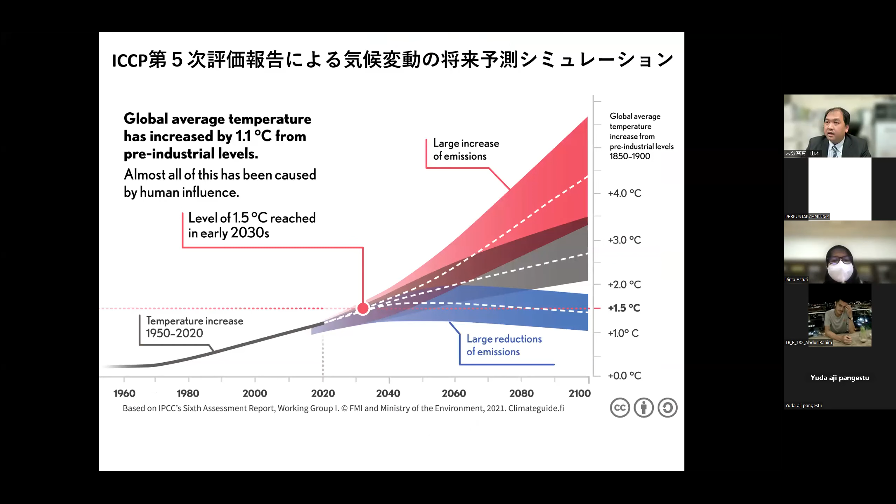Next, I want to introduce the basic principles of concrete production, 6 items, by Dr. Tokujiro Yoshida. Dr. Tokujiro Yoshida is a civil engineer of the Taisho and Showa periods. Born October 15, 1888, after teaching at Kyushu University, he became a professor at his alma mater, University of Tokyo, in 1938. He is known for his research on concrete and reinforced concrete engineering, and is considered a father of concrete engineering in Japan.

Yoshida Tokujiro said that concrete is cement paste integrated with aggregate. Second, cement paste determines the quality of concrete. Third, the properties of cement paste are determined by the properties of the cement, the degree of chemical reaction between the cement and water, and the concentration of the cement paste.

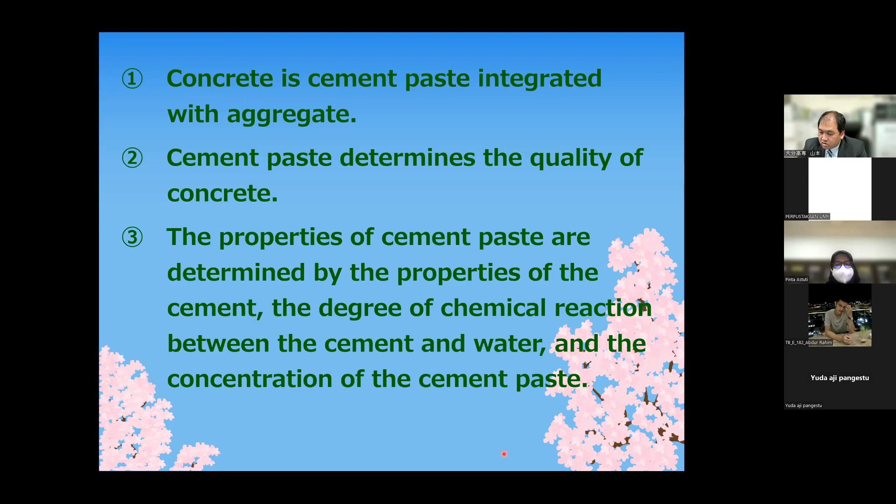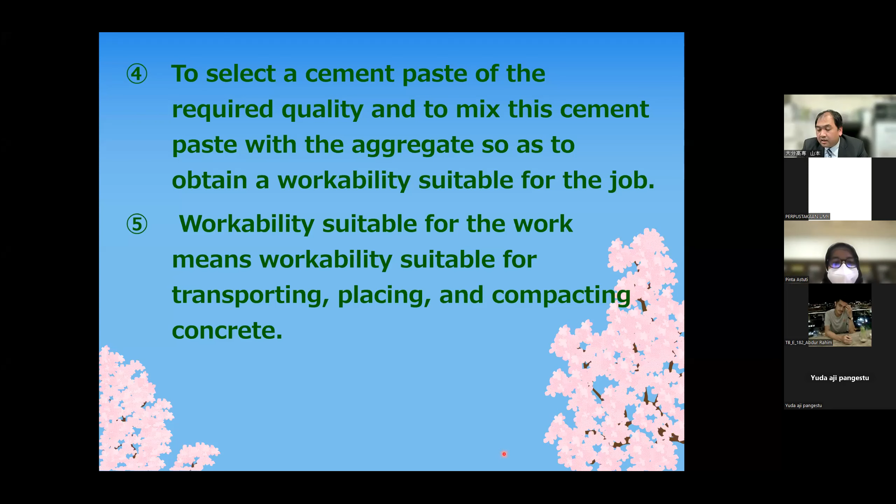Number 4, select a cement paste of the required quality and mix this cement paste with the aggregate so as to obtain a workability suitable for the job. Number 5, workability suitable for the work means workability suitable for transporting, placing, and compacting concrete. Number 6, the concrete shall be mixed, transported, placed, finished, and cured in such a manner as to fully demonstrate the properties of the concrete.

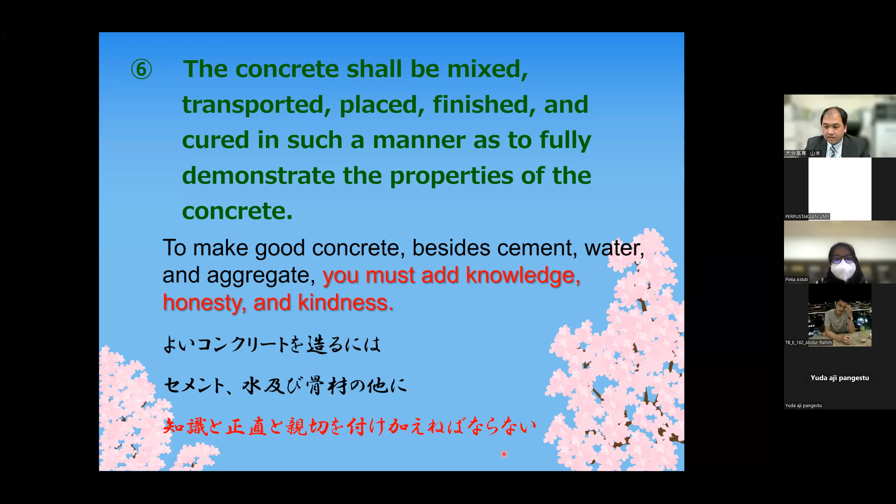And next is an important point. To make good concrete, besides cement, water, and aggregate, you must add knowledge, honesty, and kindness. He said this around 100 years before. That is all for my presentation. Terima kasih.

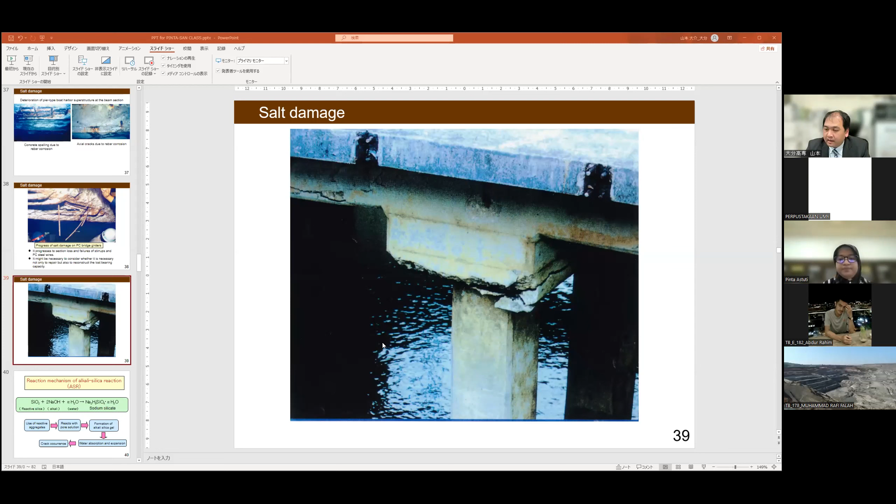And if the chloride ion penetrates concrete and reaches the rebar, then the chloride ion will destroy the passivity film on the surface of the rebar. And after destroying the passivity film, the corrosion process will start.

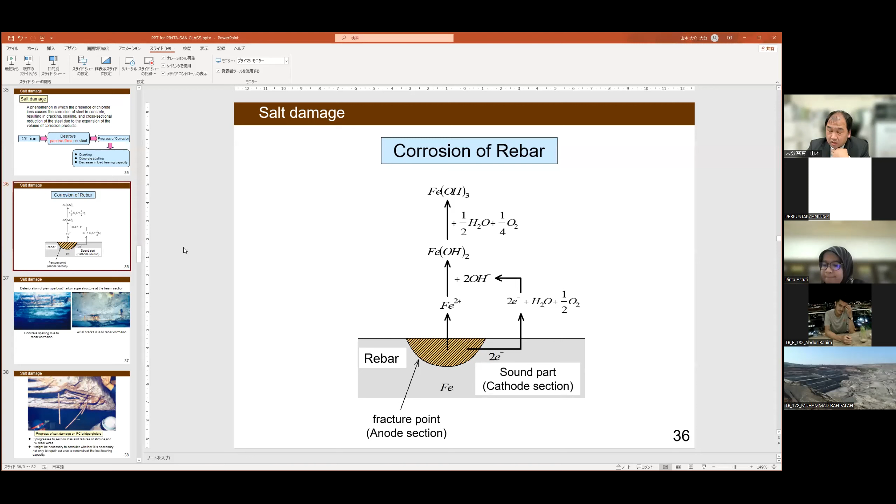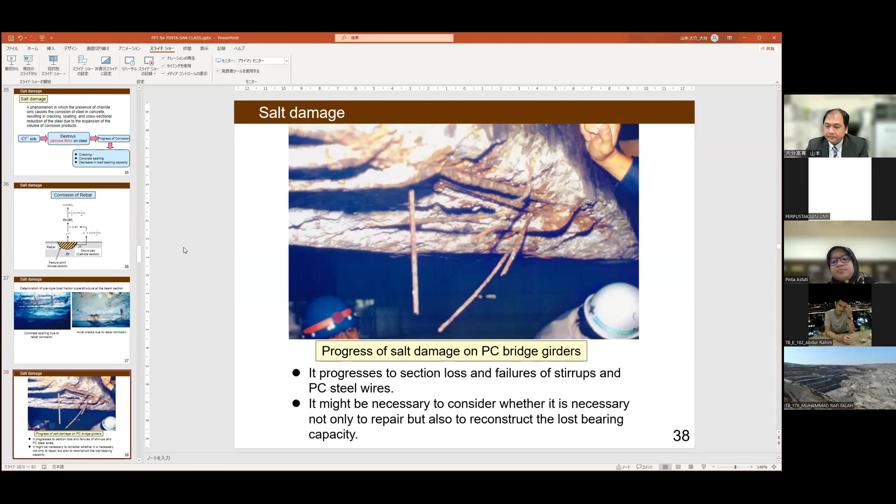So if the RC concrete structures are on the beach side or facing sea water, then from the surface of concrete, the chloride ion generally comes inside into the concrete. So in a marine environment, the RC concrete becomes destroyed like that. And to avoid this kind of deterioration, we can choose several countermeasures.

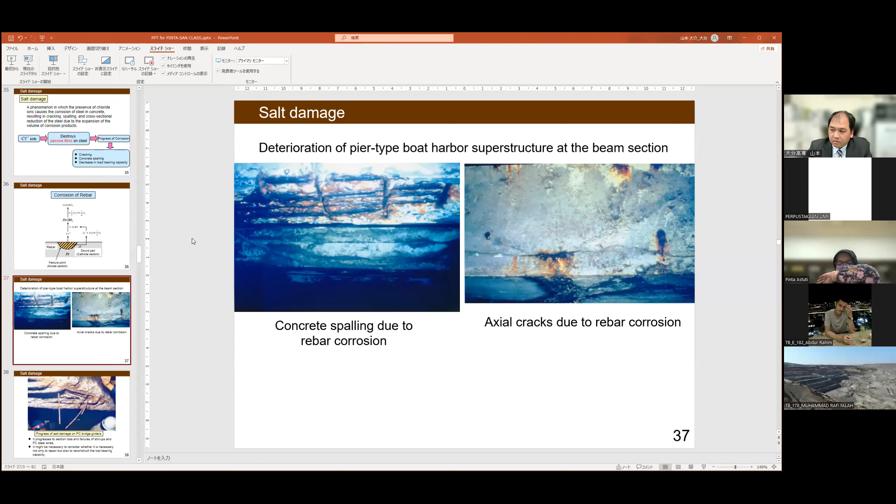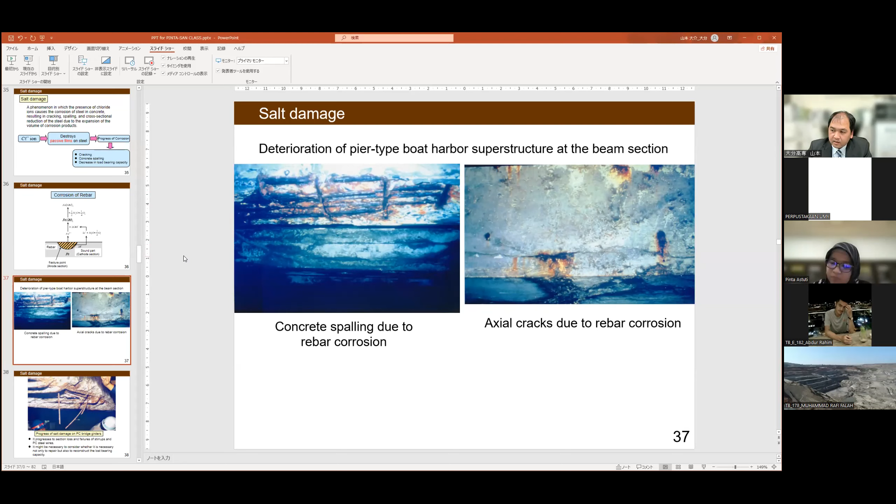One is to use dense concrete. Dense concrete means low water-to-cement ratio concrete. Then we can control, or reduce, the penetration speed of chloride ion inside the concrete. Then we can extend the service life of RC, even in a marine environment.

And next is, for example, to use epoxy covered rebar. So if the rebar is covered by epoxy resin, then even if the chloride ion reaches the position of the rebar, it will not start corroding.